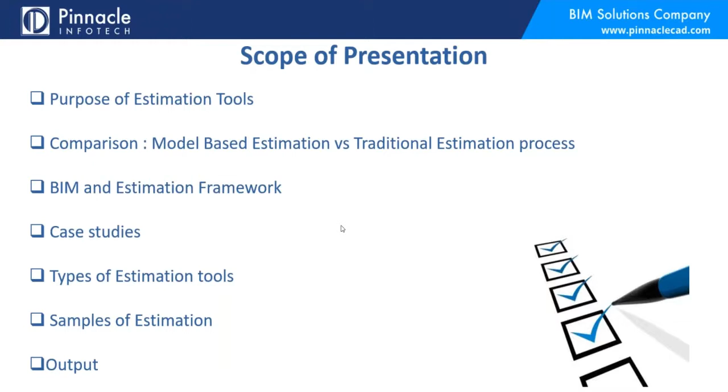Let me start this presentation with a nice quote: another step change for estimation. Though the technology continually improves, one thing does not change: the need for an estimation. In this presentation, I will be sharing a brief overview of model-based estimation framework, our process and deliverables.

So let's start with the very basic purpose of estimation tools. The purpose of estimation can be subdivided into 3 points. The first is unrealistic demand of estimation. The second is accuracy. And the third is streamlined transition from estimation model to construction. Let's talk more about these 3 points.

First, statistics of Autodesk's construction blog: estimated global construction output by 2022 is projected as $12.9 trillion. In 2019, the US construction industry alone was worth $1.3 trillion. This industry is growing at a very rapid pace, and we need tools to support the growth.

We see the challenge of unrealistic demand of estimation, as every day numerous new jobs need to be estimated, and being unable to do so essentially results in passing away potential jobs. With the help of the latest technology and tools, estimation can be prepared in very short time with maximum accuracy possible.

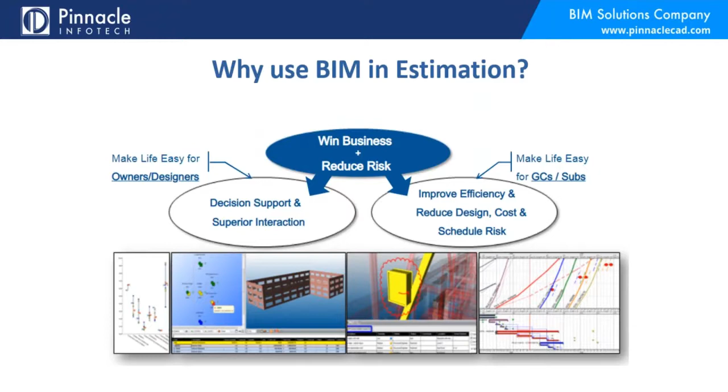Now, if we ask someone to change their process of working or to adopt a new technology, the first question will be: what are the benefits of adopting this new technology or process? So let's talk more about the benefits of model-based estimation.

Model-based estimation is a relatively new word in the industry, though it has been in talks since Autodesk strengthened Revit and other collaborative BIM tools. We can see the industry switching from design-bid-build to design-build projects, which narrows the gap between model interpretability and ensures swift transition between engineering and the site team.

This is more encouraging, as with the help of these tools, we can generate accurate quantity takeoff to bid more accurately and successfully.

Now, the second process is to automate the process with API. Technology is advancing, and construction is seeing more technical, smart aspects to take advantage of, such as automating tedious and manual tasks with application program interface, or API, integration, and algorithms. This leaves more time to review and visualize models and identify potential risk factors.

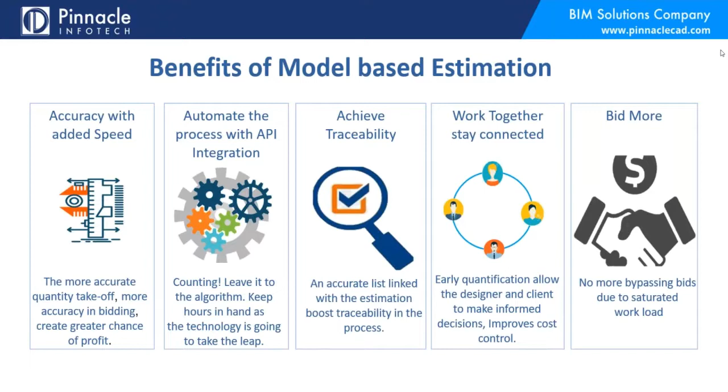Now, let's talk more about BIM to enterprise sequencing. We know that BIM ties disciplines together, that is quality, schedule, and cost. When a 3D model is visually presentable, the idea of the particular project gets clearer, as a more rigid strategy could be adopted. Thus, an easier and more accurate change management framework can be generated.

Now coming to the pre-construction part: constructability analysis, quantity takeoff, cost estimation, and project scheduling. The model can be analyzed for constructability, and the industry gives pause to encourage early construction involvement in project development.

Again, from the detailed 3D model, a more accurate idea of the numbers for materials and labor cost can be obtained, and hence quantity takeoff is more accurate than the conventional method. So one can break down the project into smaller, more accurate units that are easy to estimate.

Model-based cost estimation is the complete incorporation of cost estimation infrastructure into the BIM model. Such a system requires a BIM framework to facilitate its acceptance.

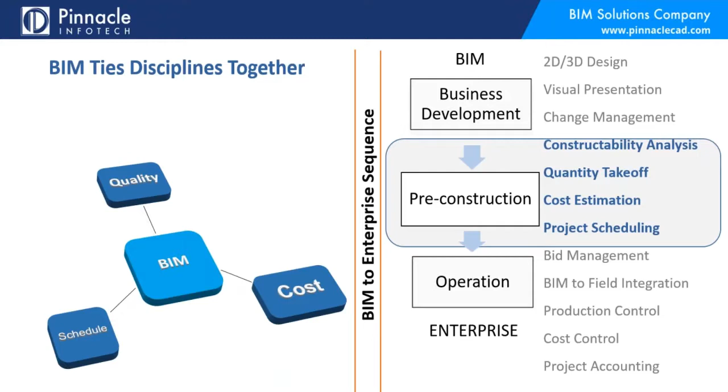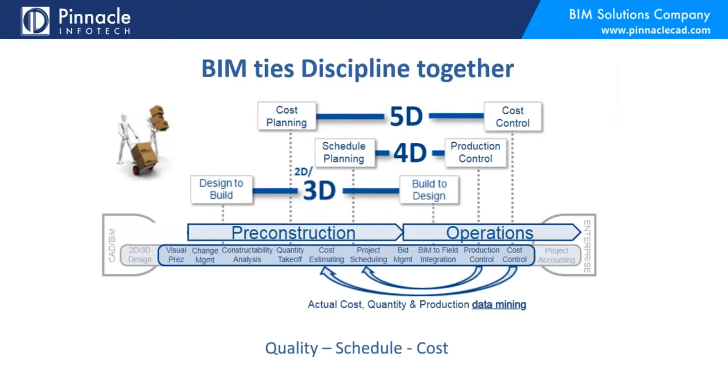So the process goes from BIM enterprise, followed by pre-construction, to operation. When it's in the 3D modeling stage, we can consider design-to-build and build-to-design. In 4D, scheduling and production control, and in 5D, cost planning to cost control.

Now, moving to the next slide, the advantages of model-based over traditional estimation process. The method of estimation adds value to the mode of work. From these, linear advantages can be derived into 5 points: chances of error, time consuming, LOD optimization, constructability review, and tedious file management.

Let's talk more about this. Since manual interpretation is limited in model-based estimation compared to traditional estimation, it's obvious that the chances of human error is less in counting takeoffs and preparation of cost sheets. Accuracy is much higher, and you are confident on that.

Traditional estimation consists of human calculation of the content or using third-party software, which is a tedious task. Using BIM, contractors expect that we can perform takeoffs 3 to 5 times faster than before, while cutting down the overall time to estimate projects by up to 50%. Further, it enables the cost estimator to add more value in the earlier phase of planning, where cost calculations are more central to the iterative design process.

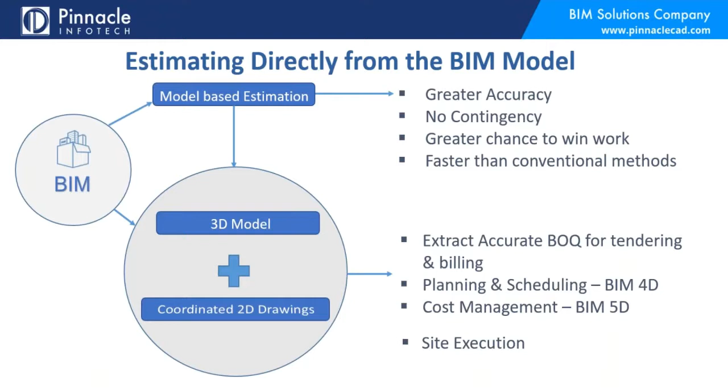And one of the most important advantages is cost management. Estimating the cost of almost every stage of the construction process is possible with the help of the 5D framework, which helps the site execution process.

Now, the most important area, the process flow of model-based estimation. Let me show the process in a very brief way, including what items are required to generate the reports with the help of Revit and fabrication capability.

Total work is segregated into 3 phases. The first one is developing the framework and setting up the database. The second one is modeling and identification of risk factors. And the final, third one is quantification and costing. Let's talk more about all 3 phases.

The first phase starts with mutual trust, as the contractors need to share their fabrication database or region-based material catalog with pricing, preferred fabrication, and installation standard data. After availing the data, the team creates or gathers the information regarding the catalog shared, like generating the fittings, accessories, equipment, and other installation or site-related items.

Now, creation of the database or adding parameters to the items related to cost code, unique tagging, fabrication, labor and installation cost generation is the first phase of the process flow diagram. This is the main time-consuming work of all three phases and should be done based on the client-provided data.

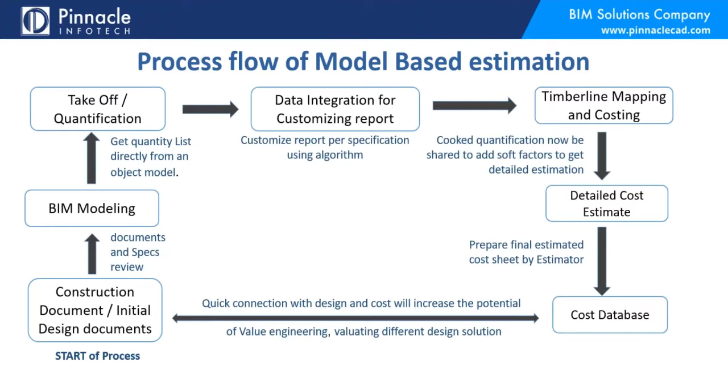We have already shared that in the BIM stage, preparing a 3D model requires good industry experience, as there is very little scope of questions being answered by engineers. So best practices should be applied in case of any issues.

To prepare any model, we try to arrange a kickoff meeting where we ask about the service specification to prepare our database, based on which the model will be created.

If the service specification is not available, we can prepare the model with the help of generic fittings and accessories. We try to prepare our model in such a way that it can be used in the next step of the project, if the project is awarded.

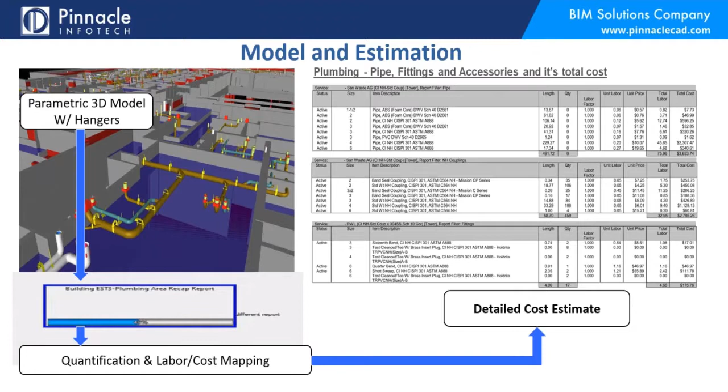So quantification can be done at any stage of the project, and to prepare cost estimation we may need some information like logistics costs, unit cost, labor costs, and others.

The output from the model-based estimation can be generated as length and size of pipes, number of fittings, accessories, equipment, weight of duct in pounds, labor cost, fabrication, installation and others, material and material cost, liner and wrap cost, and material scrap factors.

So now Scott, you can take it forward and share the access with Rob so that he can take it forward.

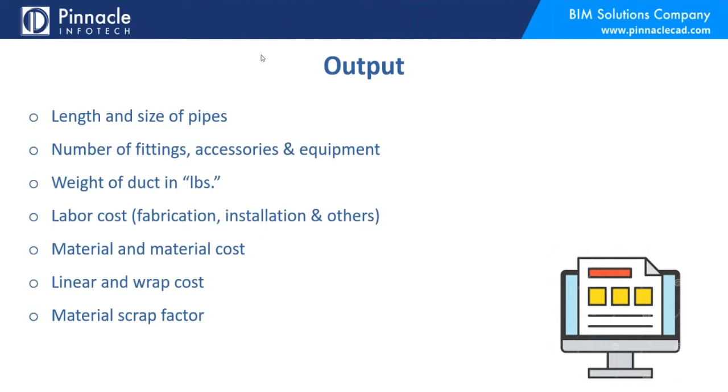This particular case study considers a plumbing bathroom group of 4 fixtures. We put the information based on total time savings by minutes. You can see our net time to complete was 19.3 minutes using a traditional method, which would be a hand-type takeoff.

Versus our model-based estimation of 9.3 minutes, that's about 48% faster estimating time, and then a total cost savings of labor cost savings for your estimator of about 22%.

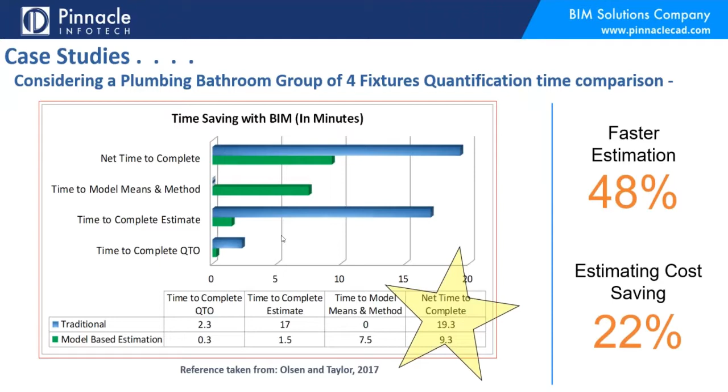Our next case study was a 1,250 square foot duplex architectural and structural building. You can see highlighted in red for a direct comparison, we had vertical constructions as our category, and the contents were masonry isolation. A total time taken for manual entry was about 450 minutes.

In Revit, we were able to complete that same takeoff in 30 minutes. You can see the remainders, with the wall surface, which contains the plasters and paints, 330 minutes compared to 20 minutes, as well as the ceiling composition, a total of 20 minutes versus 15 minutes.

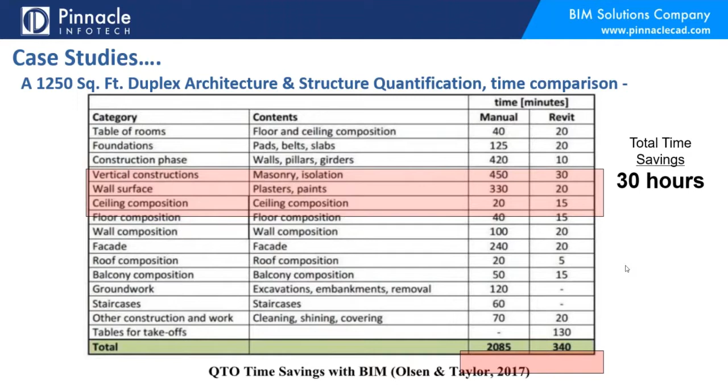So one of the main things is, how is the construction industry estimating today? The answer really isn't simple. It seems to vary dependent upon company size and industry.

Some are performing hand takeoffs using manual data entry methods to track quantities. Essentially, they're scaling off of a PDF set of drawings, inputting that information into an Excel spreadsheet format, or I've actually seen some companies just writing it on a piece of paper and handing it in. And of course, that all varies based on the size of the company.

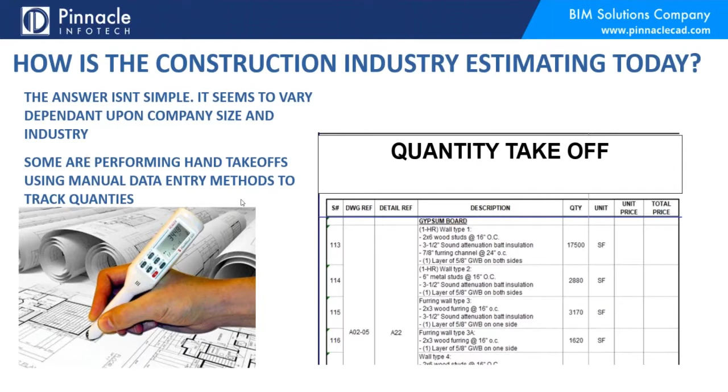Another common method I've been seeing across the industry is third-party software specifically for MEP contractors, designed specifically for estimating based off of 2D plans. And then of course we see 3D BIM software such as Revit taking a stronger hold within the estimating arena.

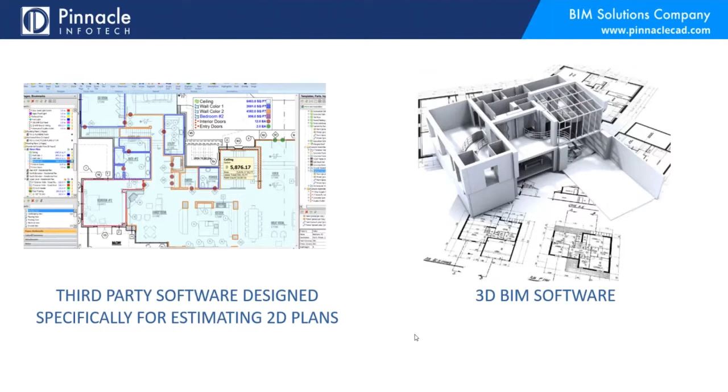So the estimating services provided by Pinnacle Infotech and the tools of our trade. For mechanical and plumbing, we have chosen to go with QuoteSoft and utilize QuoteSoft software. There are several different softwares available that are out there.

If you possibly use a different software and are interested in working with us, we are more than happy to take a look at that software and see if there's a cost benefit, and do a cost analysis to join that or to use that software, to purchase that software, and then work with you in future on projects.

Now the input type is contract plan documents in a PDF file format. The output, the deliverable from this type of software, is a detailed material takeoff, including equipment quantities. These equipment quantities have direct links to major manufacturers such as Trane, York, a few others that we can list. We have the ability to add client-specific labor rates and custom quotes from various manufacturers.

Complete bid tab utilizing Excel worksheets. We have the ability to import your customized bid tab, enabling a seamless transfer of information. So in the event that you do use a program such as QuoteSoft and you have an extended template that you use that you've created, we have the ability to bring that in and train on that, and then provide that information back to you.

And then of course there's also a change order management process and document comparison with QuoteSoft.

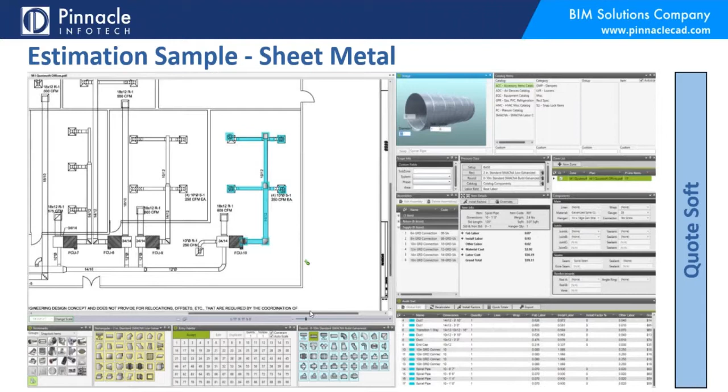So now for labor costs and mechanical equipment and accessories, along with a vendor sheet, you can see on the left-hand side, highlighted in blue, we have a small window pane all the way around. That's an area that we have selected, and then another window will pop up, and that will give us the exact amount that's contained within that section.

So for this particular instance, we're looking at the material cost and labor breakout. So this example is showing that rectangle duct, as there's 169 pounds of rectangle duct with a fabrication hours of 4.635, the install of 5.4 hours, and there's a total of 9 pieces.

Now, being said, with the fab hours and the install hours, we have the ability to customize those rates and input your shop specific standards or your company specific standards, or however you want to look at that number.

Now on the other side, we show the round for a total of 37 pounds, fab hours 0.28, and install hours of 3.72. At the very bottom of the pop-out pane there is a total cost just for this specific amount of work that we're highlighting, which is $1,771.48. The accessories are showing up on the upper right-hand side.

Vendor costs can be added depending on how you approach your accessory counts. Some companies will do a complete takeoff of all accessories, send it off to quote, depending on how many different manufacturers are allowed per specification or whoever they have buying agreements from. So we have the ability to take that information and then put it back into QuoteSoft and then prepare the estimate that way.

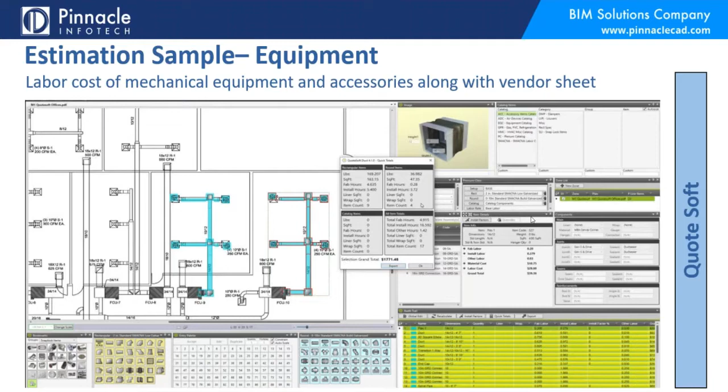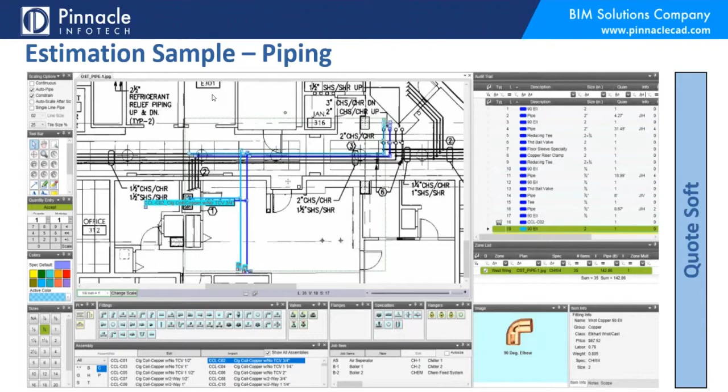QuoteSoft also has the ability for mechanical piping. It's very similar to the same methodology for the sheet metal. This database contains tool palettes containing every part and piece that we use. It's based off of material types and specified labor factors. Now, with this ability, we do have the ability to use MCAA labor rates and factors, or we can use the information that QuoteSoft provides within their program, and that's based off of their historical data that they gathered.

As far as change order management, we have the ability to insert a PDF that has indicated changes and overlay them of a particular area. The new work is highlighted in red. That gives us an instant view of what has changed, and then we can add that to the takeoff as well.

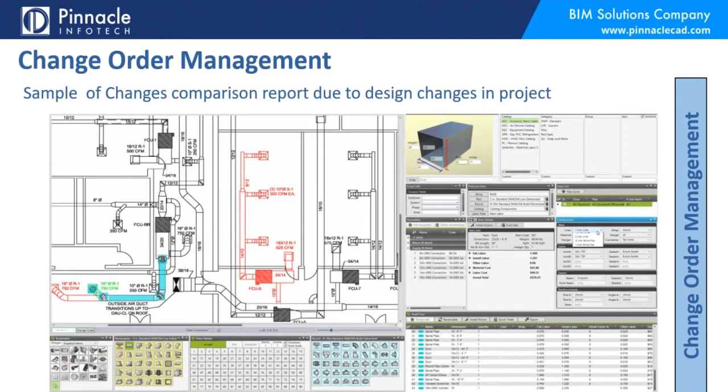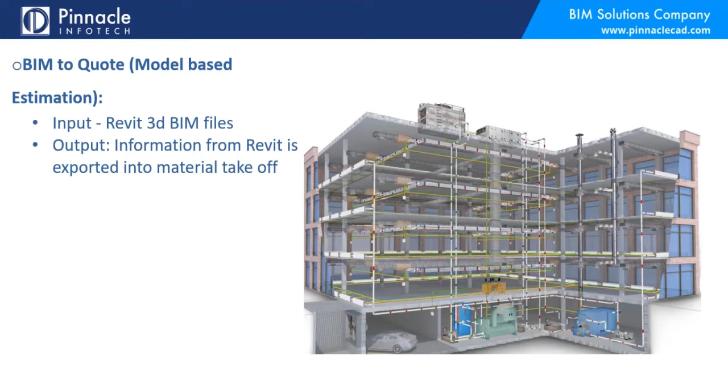The next method of estimating is what we call model-based estimation. The input is Revit 3D BIM files, and the output information from Revit is exported into material takeoff forms. There's an integration of API in Revit for estimation.

API is the application programming interface. An integration based on an API offers a very close link between software applications. For example, the Revit API allows independent software developers to create software programs that can access elements of the Revit building information model. Essentially, we can extract the information contained in the model, getting specific data out of it depending on whether it's a wall type, masonry type, or a mechanical MEP system. Whatever data is contained within that model, we can extract it and format it into a quantity takeoff.

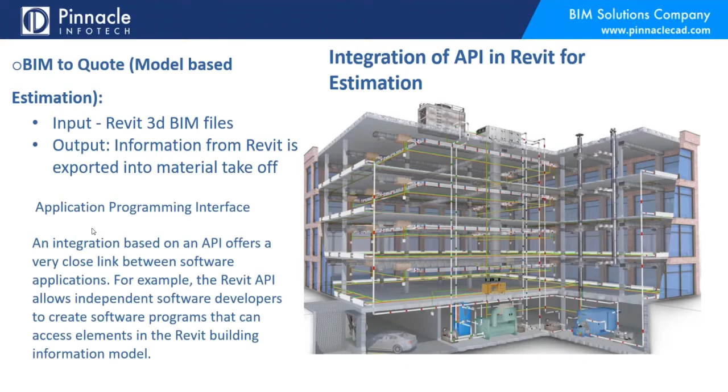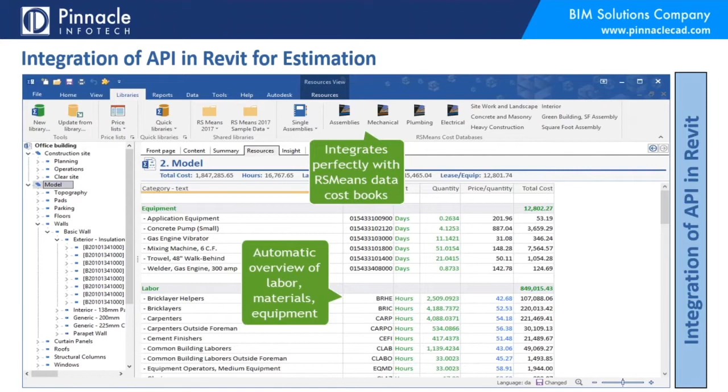So, integration of API in Revit for estimation - this is our tool of choice that we use. This is what it looks like. It's a fairly easy window pane to follow. It integrates perfectly with RSMeans data cost books, giving an automatic overview of labor, materials, and equipment. It's a well-known Office user interface, so it looks very similar to Microsoft products.

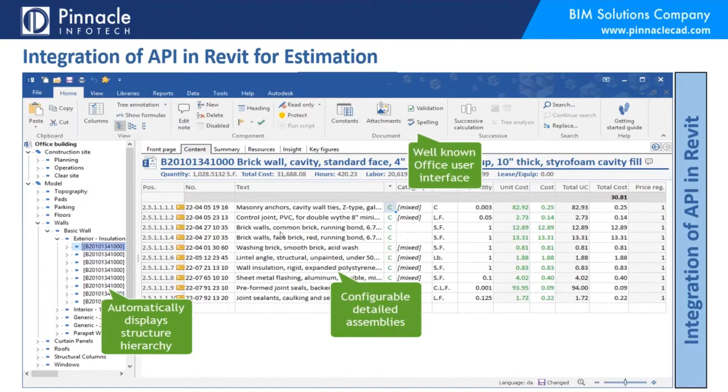It looks similar to Microsoft products such as Word and Excel. It has configurable detailed assemblies that automatically display structure hierarchy. It's easy to set up with new slice and dice views, and there are different arrangements we can make. We can customize this data and put it in any arrangement you would prefer to see.

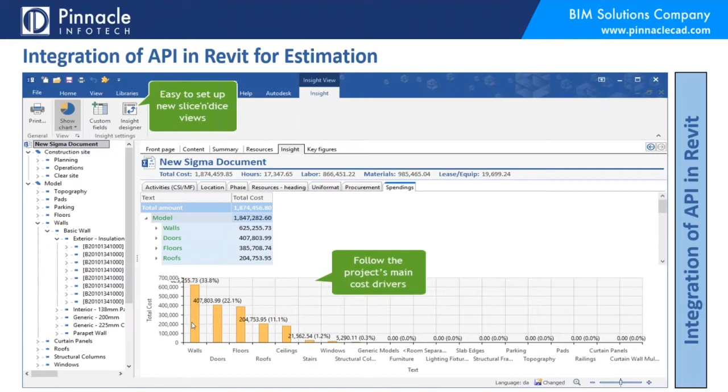And it follows the project's main cost drivers, so you have the ability to separate things out and take a look and see where the bulk of your project is coming from versus what the minor pieces are.

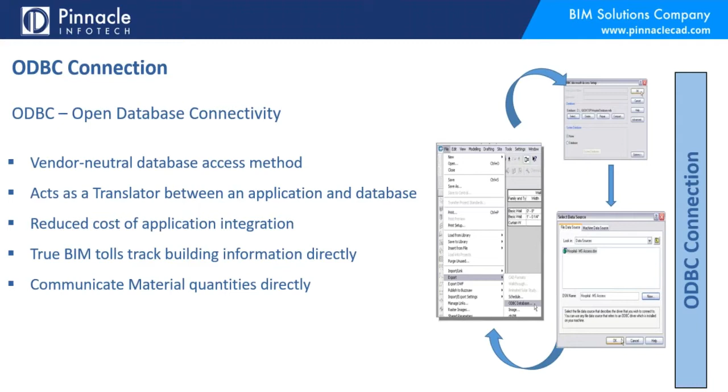The ODBC connection is the Open Database Connectivity, a vendor-neutral database access method. It acts as a translator between the application and database, reducing the cost of application integration. True BIM tools track building information directly and communicate material quantities directly.

Here's an example of an output of our reports coming from our 3D BIM quantity takeoff or estimate. You can see that it's listing the pipe size along with the pipe material type, telling exactly what it is, giving you the length and whatever the labor factor is. That labor factor can be established for whatever you may want - you may want it to be 1.5, 0.85, or 0.75, whatever you need it to be. We can adjust that in order to get your overall unit price and total labor cost.

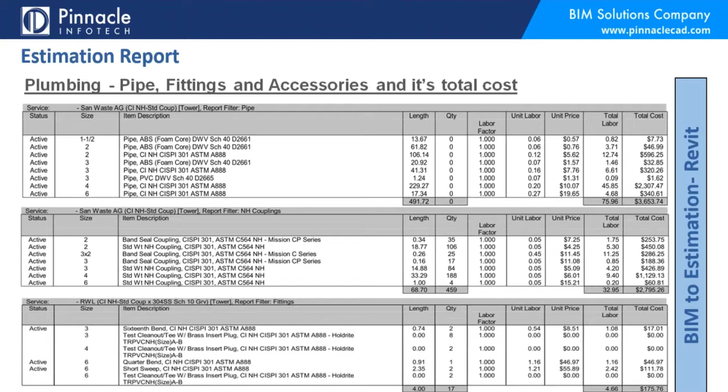With this type of process, we can trace over a 2D outline of the material and place 3D objects and elements that contain specific data for fabrication for sheet metal, based off of SMACNA standards. They carry the specific gauges, flanges, connections, bracing, and intermediate bracing, things of that nature.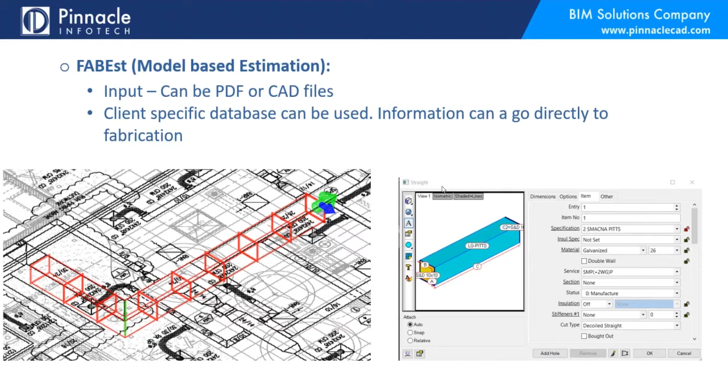So with that said, that's the services that we offer, and we definitely look forward to helping you loop the BIM world into your company. We look forward to having an opportunity to work with you and become a better partner, building a bigger, stronger relationship by getting in sooner and helping you develop an accurate cost - alleviating some of the stress that most estimators find themselves in at the end of the week when it's Friday night, 8 o'clock, and you still have 8 to 10 estimates you need to push out.